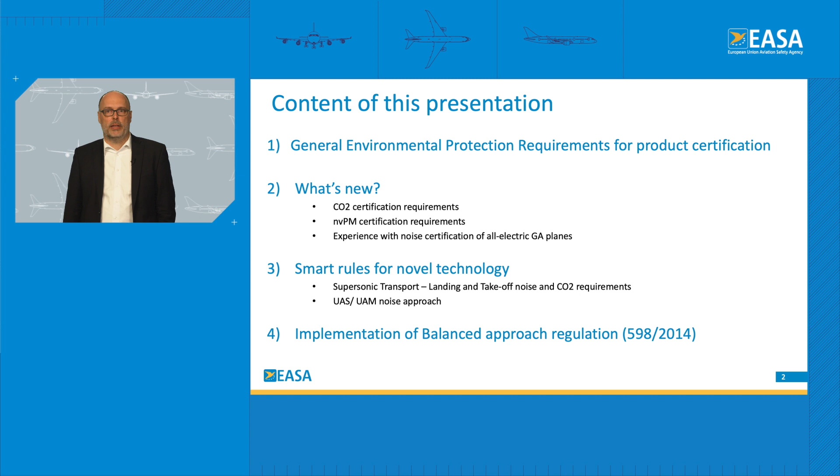Thirdly, I'll be introducing the current environmental protection requirements development activities for novel technology areas such as supersonics and drones and urban air mobility concepts. And lastly, I'll be explaining new tasks of the agency in the area of the Balanced Approach Regulation 598/2014. Without further ado, let's dive into the first section of my presentation.

Environmental requirements for product certification are globally harmonized at ICAO and are directly applicable in Europe by reference to ICAO Annex 16 through Article 9 of the Basic Regulation, Part 21 specifying the applicable environmental protection requirements, and Paragraph 21B85, and lastly, EASA certification specifications for engine emissions in CS-34, aircraft noise in CS-36, and aeroplane CO2 emissions in CS-CO2.

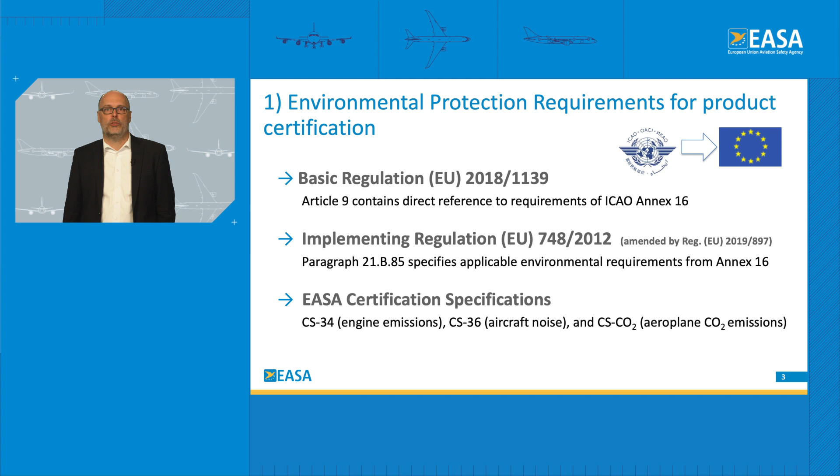The standards for environmental protection requirements are defined in the respective ICAO Annex 16 volumes. The applicability to the relevant product categories is defined in the respective ICAO volumes at the aircraft level, the left and center icon for noise requirements and aeroplane CO2, Volume 1 and Volume 3 respectively, and engine level displayed on the right-hand side for engine emissions requirements, which are laid down in Volume 2 of ICAO Annex 16.

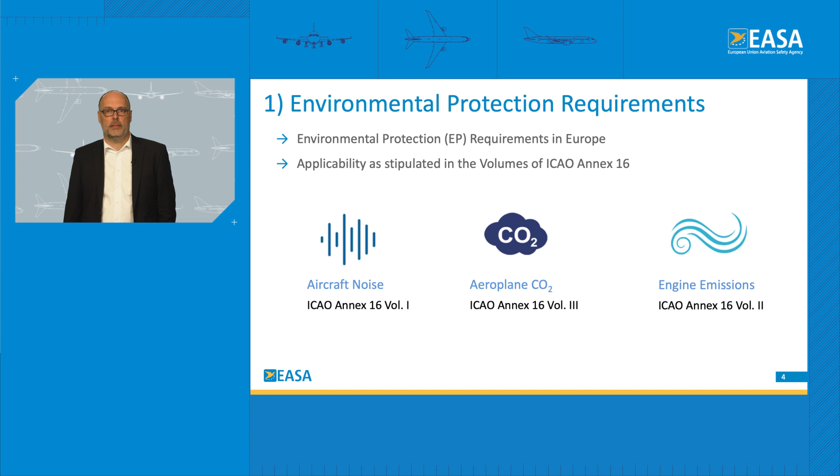EASA disseminates environmental certification data through its website. The all-new EASA Aeroplane CO2 emissions database is containing the first ever CO2 certified aircraft, the A330neo. Next, the EASA noise database contains all certification noise levels for aircraft configurations certified by the agency. And by the way, this data is transmitted to the national aviation authorities and serves as the basis for the issuance of EASA Form 45 noise certificates. Lastly, ICAO Engine Emissions Database is one of the databases hosted by EASA, and it contains engine emissions certification data.

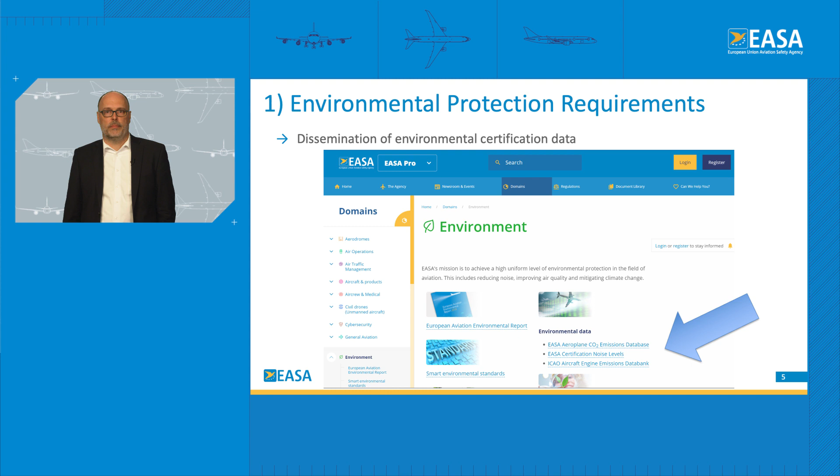So we'll now move into the second part of my presentation, in which I will focus on the newest environmental certification requirements that have come into force, starting with aircraft CO2 requirements, followed by non-volatile particulate engine emissions requirements, and furthermore, I will give a brief update on the takeaways of the first noise certification of an all-electric aeroplane. With that, I will move to the new aircraft CO2 standard.

The CO2 standard is applicable for new types of large transport aircraft as from January 2020. There is a transitionary phase between 2020 and 2028 in which changes resulting in CO2 changes and other than large transport aircraft are gradually subject to CO2 certification requirements.

What tells us the CO2 metric? Well, in a nutshell, it is the reciprocal of the specific air range, SAR, in kilograms fuel per kilometer flown, averaged for 3 reference points and adjusted for fuselage size. 3 reference points for different weights are taken into account for low, medium, and high weight and in their respective optimal conditions. EASA is involved in the relating CO2 compliance demonstration by means of dedicated flight testing and assessment of performance data.

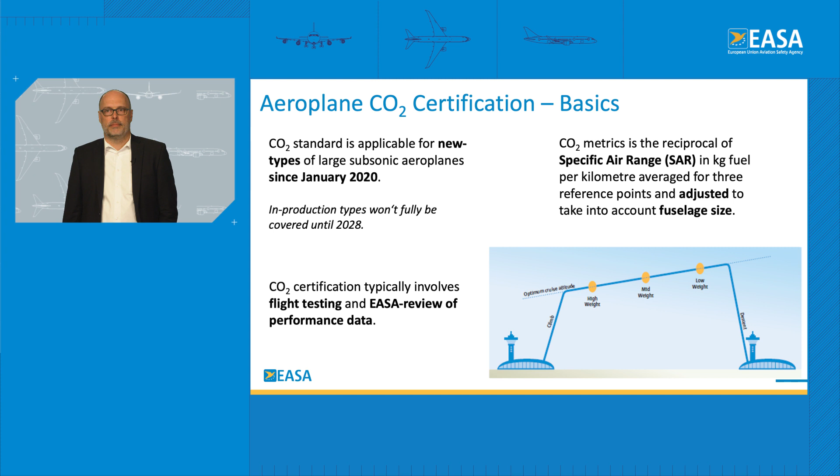What is the applicability of the CO2 standard in detail? The following aeroplanes are affected: new aeroplanes, subsonic jets above 5.7 tons of maximum takeoff mass, propeller-driven aircraft above 8.6 tons of takeoff mass are affected from January 2020, and new business jets will become applicable as from January 2023.

Then, furthermore, derived versions of non-CO2 certified aeroplanes will become applicable as from 1st January 2023, with derived meaning an increase of CO2 of more than 1.5% or a significant CO2 change. And finally, in-production aeroplanes will be subject to the new requirements as of 1st January 2028.

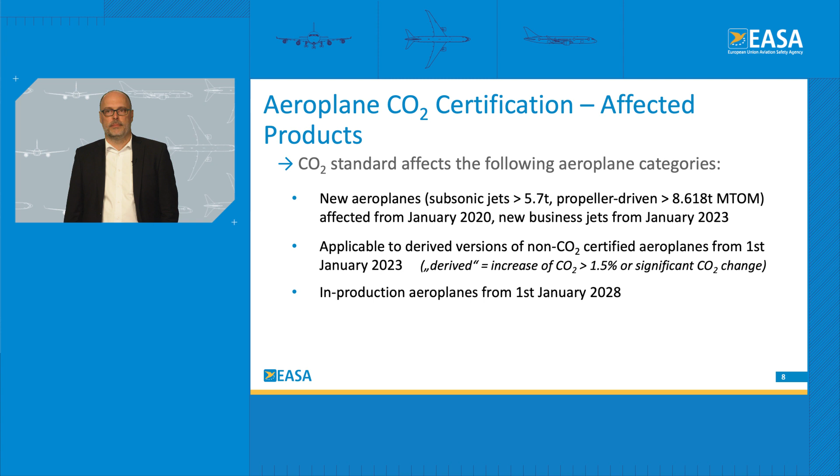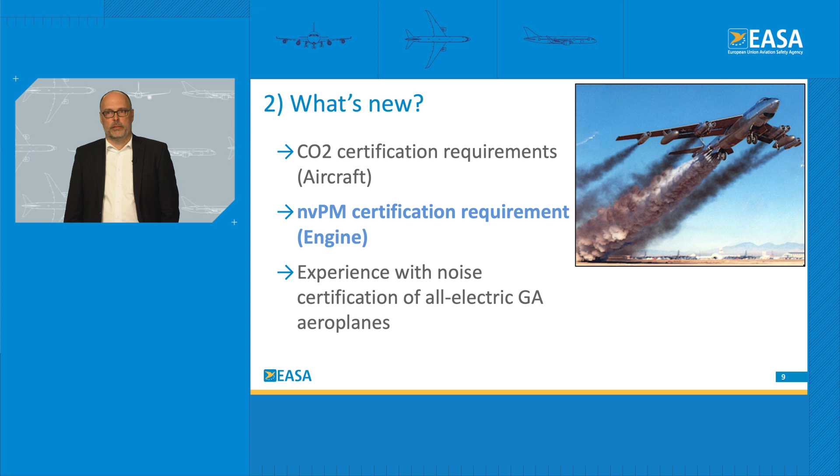Let's now turn to requirements for non-volatile particulate matter emissions. This requirement is a standard applicable at engine level in comparison to the CO2 standard, which is applicable at aircraft level, and replaces the outdated smoke number standard. The newest requirement for compliance with the nvPM standard, that is the non-volatile particulate matter standard, will affect all engines in production after 31st of December 2022.

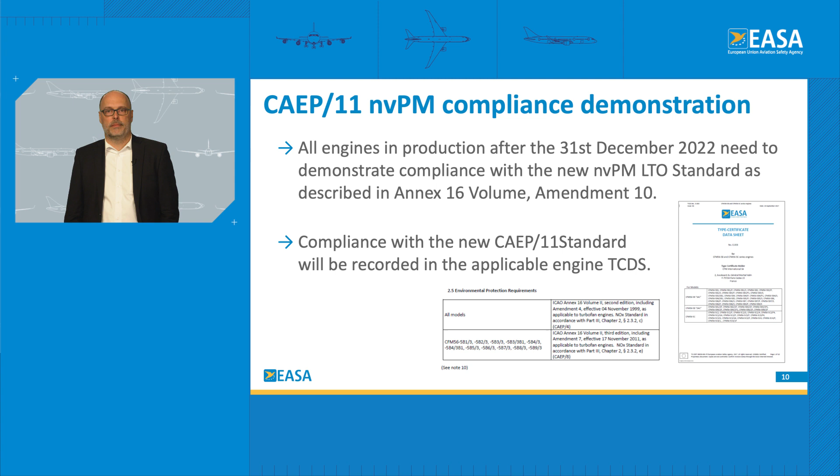All engine manufacturers with products that requirement is applicable to need to demonstrate compliance with the nvPM CAEP/11 landing and takeoff standard. The engine type certificate data sheet issued by EASA will then be amended to capture the respective compliance. Last but not least, in this presentation block, I will now turn to the lessons learned from the noise certification of the first all-electric general aviation aeroplane.

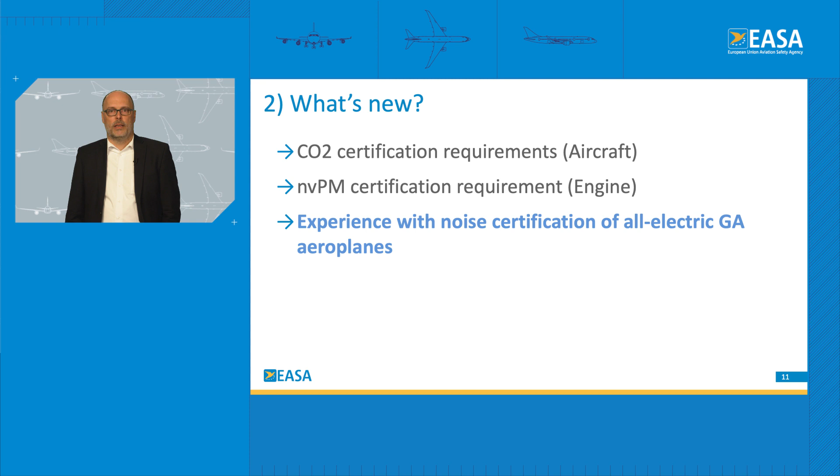EASA certified the fully electric Velis Electro SW128 of the manufacturer Pipistrel about a year ago against ICAO Chapter 10.4b noise requirements. Results and lessons learned were presented to ICAO CAEP Working Group 1, which develops and maintains noise certification standards.

The main conclusions so far: the prop noise is still of high relevance. Helical tip Mach number corrections need to take into account the slightly reducing RPM over the duration of the test. Overall, for now, it can be said that Chapter 10 seems to be fit for purpose for all electric aeroplanes. We have currently no indication that new regulatory schemes would have to be developed to specifically accommodate the noise certification of all electric general aviation aeroplanes.

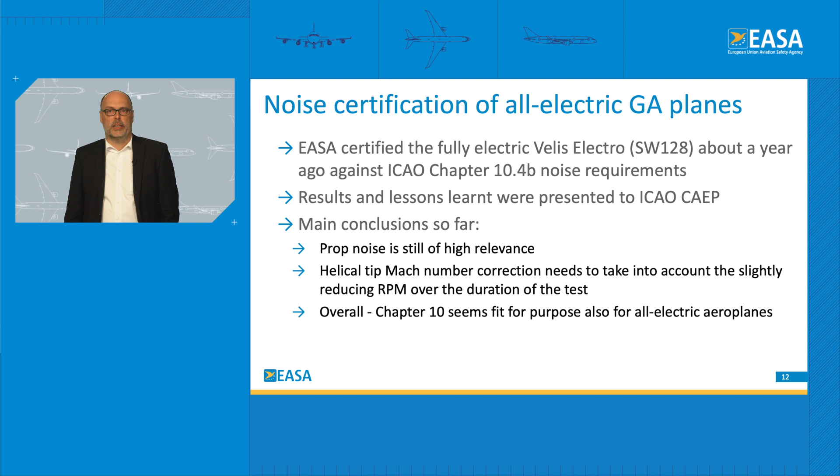Let's now turn to the third part of my presentation, in which I want to address how we cope with the novel technologies. Firstly, let me emphasize that EASA works with its international partners to ultimately define globally harmonized environmental protection standards. Only in order to bridge the gap until those globally harmonized requirements have been enshrined in the respective ICAO Annex 16 volumes, the basic regulation now foresees the mandate to establish dedicated European environmental protection requirements.

While working on those environmental protection standards, we are guided by our strategic objectives, namely, environmental certification is innovative and cost-effective, facilitating new technologies that are environmentally compatible, and environmental standards are smart, proportionate, and contribute to the competitiveness of the industry.

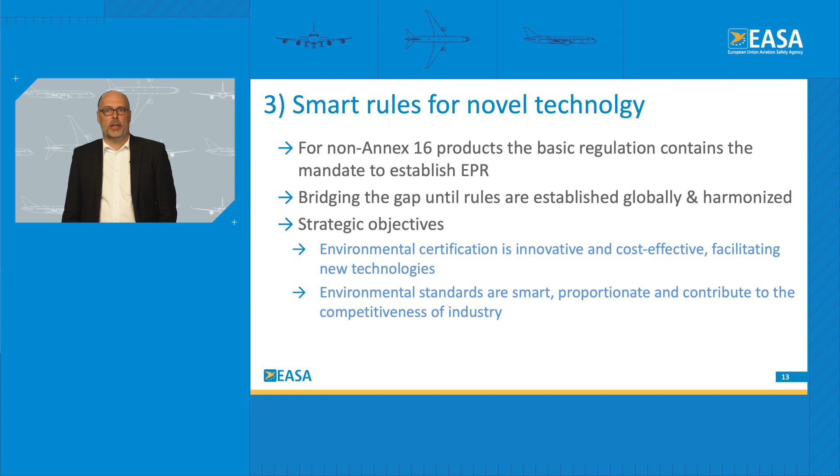Let's now look into specific examples of novel technology and how EASA engages in defining environmental protection requirements for those products. A new field of technology which is worked on by many companies is the next generation of supersonic transport aeroplanes, the heirs of Concorde. While this fascinating technology opens up new opportunities, it also comes with a number of considerable environmental challenges.

To address these challenges, and to give guidance to the manufacturers, EASA is working in two regulatory streams to first prevent sonic boom in Europe by banning flights at speeds at or above Mach 1 over Europe through amending the Standardised European Rules of the Air. At the same time, the agency experts are engaging with international standard-setting bodies in the development of a potential en route noise certification scheme that could ultimately enable low-boom overland flights.

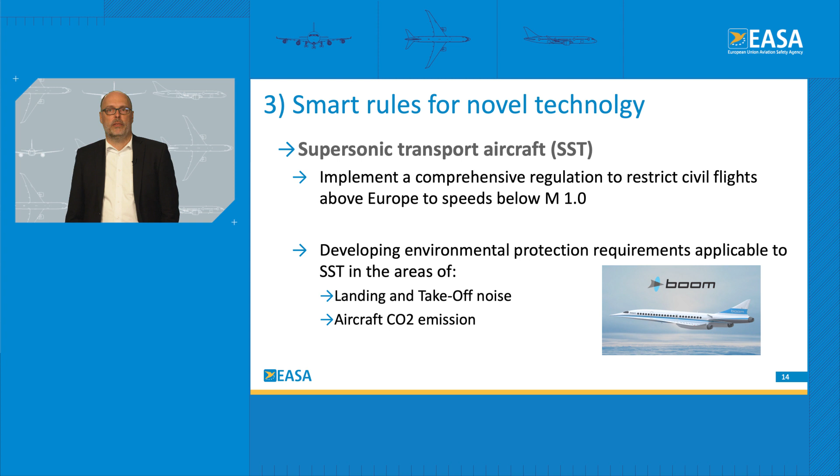And secondly, while the first stream looks at more operational aspects, the second work stream targets the definition of environmental protection requirements for supersonics in the area of defining landing and takeoff noise standards and aircraft CO2 emissions requirements. These certification requirements could be published for consultation as early as the beginning of next year.

Drones and urban air mobility concepts, or air taxis, are another fast-growing sector that offers new business opportunities, but similar to supersonics, comes with challenges in the domain of environmental protection. EASA has been commissioning a number of studies to investigate source noise characteristics of drones and eVTOLs, as well as starting psychoacoustic studies with the aim of building dose-response relationships for drones and urban air mobility concepts, noise versus annoyance. These activities, which are currently underway, are initiated to aid the design of an appropriate noise measurement scheme that accommodates a wide variety of drone designs. And you can see on the left-hand corner a number of examples for different drone designs.

While working on this scheme, the challenge is to cover multiple designs and parameters, design a comprehensive and robust measurement procedure, define the noise metric, and ultimately set appropriate noise limits that on one hand facilitate the novel technology, while safeguarding, on the other hand, that the maximum permitted noise levels are not harmful to human health. Amidst this endeavor, the noise measurement scheme will have to satisfy a number of key criteria. The noise measurement conducted following the scheme will have to be repeatable, accurate, fair, meaning ensuring a level playing field, proportionate, and representative of noise impact to population. Similar to supersonics, we will be working on defining applicable environmental requirements, which will ultimately be published for consultation.

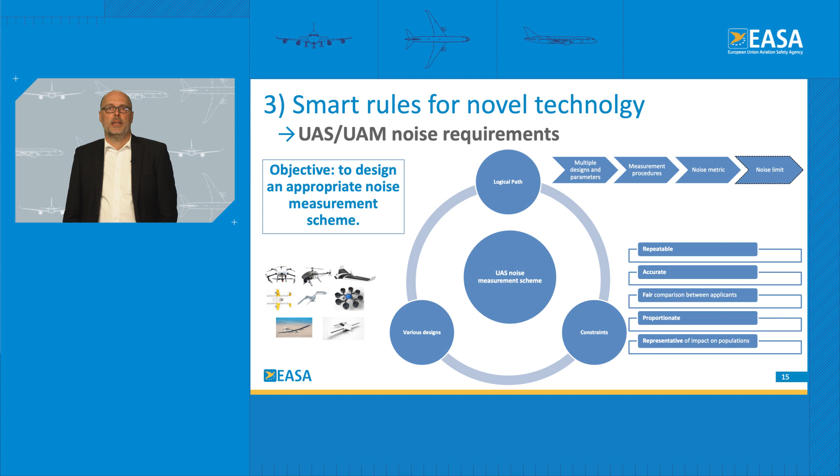Let me now come to the last part of my presentation, the implementation of the so-called Balanced Approach Regulation. The actual full title of the Regulation 598/2014 is Establishment of Rules and Procedures with regard to the introduction of noise-related operating restrictions at Union airports within a balanced approach. This regulation puts specific obligations to EASA I want to briefly introduce to you.

Firstly, the agency is requested to collect, verify, and make available aircraft noise and performance data. This is data that is used for computation of noise contours around airports, and this task has previously been carried out by Eurocontrol. We frequently publish new aircraft noise and performance data sets, and these are available on the agency's website. Secondly, the agency is collecting noise documentation of individual aircraft operating in and out of Europe. Through a dedicated environmental portal, also referred to as Aircraft Noise Certificate Database, ANC, we make this data available. As said in the beginning, access to both data sources can be found on the EASA webpage.